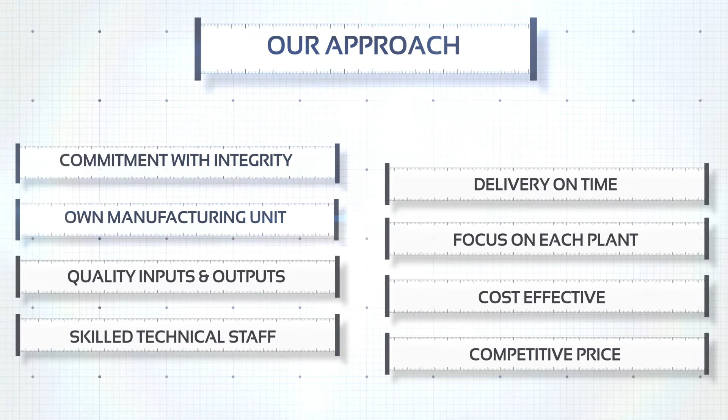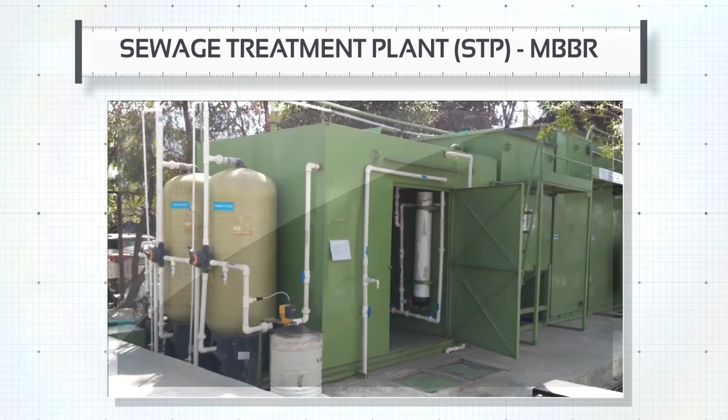Our water treatment solutions: STP, Sewage Treatment Plant, MBBR. We design, fabricate, erect, and commission packaged prefabricated sewage treatment plants with various technologies for treating sewage generated by residential setups within industries, large colonies, hotels, hospitals, IT parks and commercial buildings.

Our MBBR plants use specifically cultured bacteria on a high surface through floating media and reduce the organic load by more than 90%. The treated water can be used for gardening, floor washing, toilet flushing or disposal. It is available in sizes from 5 KLD to 250 KLD. Bigger sized STPs are designed in civil works with a customized approach.

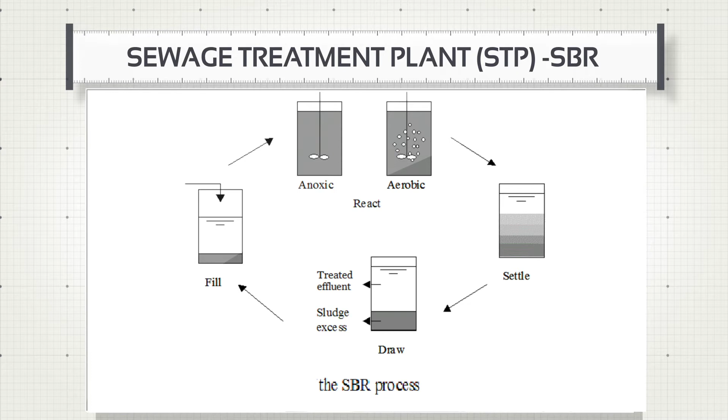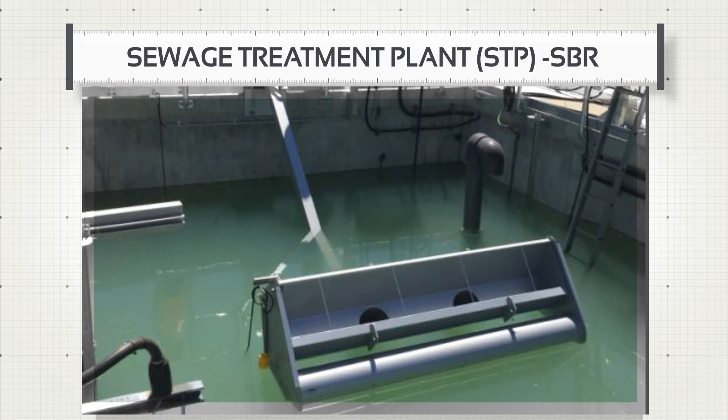STP, Sewage Treatment Plant (SBR). We undertake turnkey projects for wastewater treatment plants based on SBR technology, ranging from sizes 25 KLD onwards. A sequencing batch reactor is a fill and draw, activated sludge system with 5 basic steps: idle, fill, react, settle, and draw, thereby producing a high-quality effluent with low turbidity and nitrogen levels.

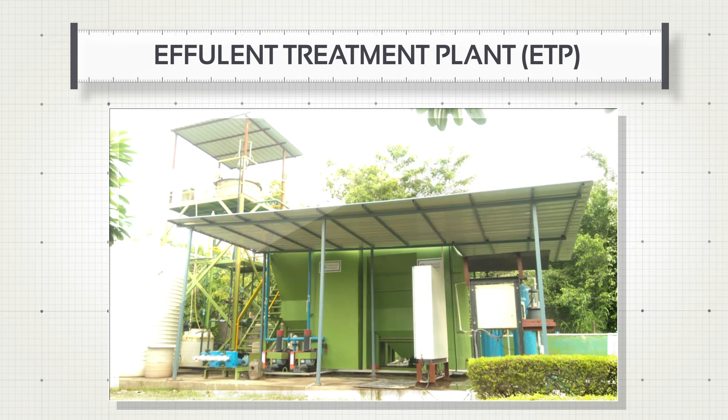Effluent Treatment Plant (ETP). As your partner in corporate commitment to protect the environment, we offer technically and economically efficient solutions to treat industrial wastewater of any type and level of impurities. We offer packaged ETP with nitrification and denitrification.

The choice of treatment stage comprises physiochemical treatment, anoxic bioreactor, fluidized bed aerobic bioreactor (FAB), and other advanced wastewater treatment strategies for recovery, reuse and recycling.

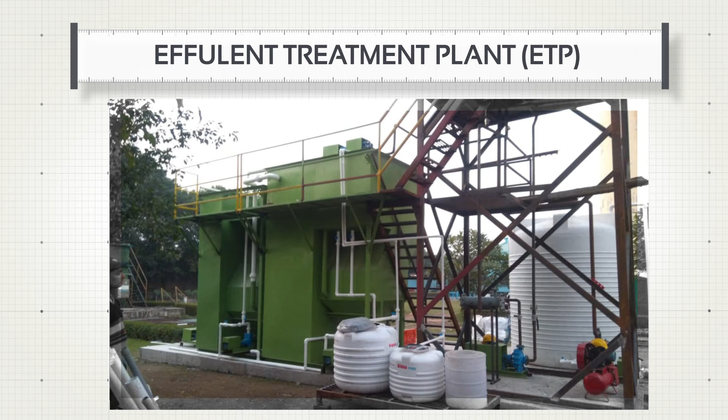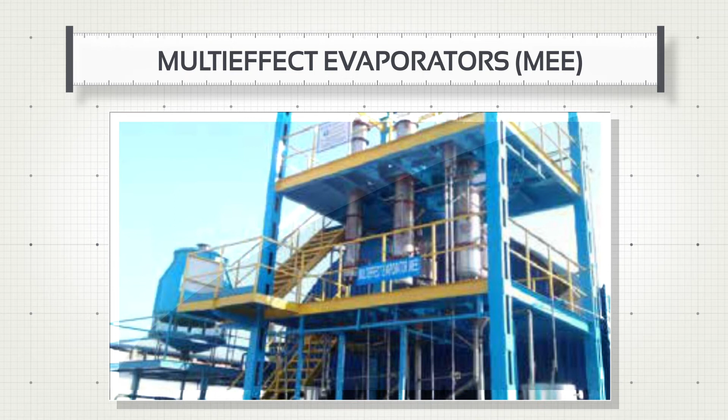Multi-effect evaporator, MEE. Evaporation is a process to concentrate a non-volatile solute from a solvent by boiling of the solvent. It is a special case of heat transfer to a boiling liquid, resulting in separation of a liquid mixture into a liquid product and a vapor.

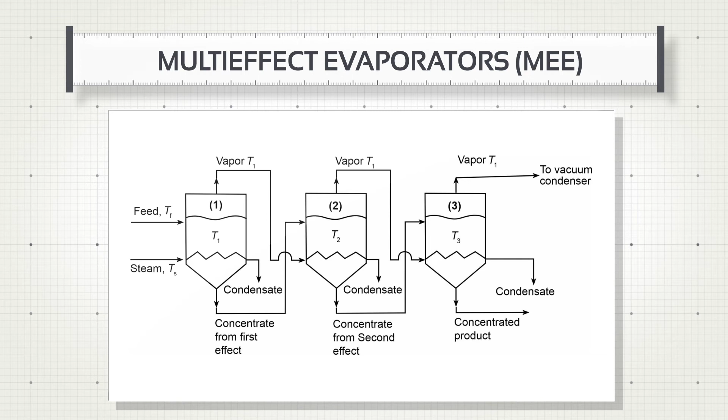The design of an evaporator should be with the objective of economy. The chief factor to obtain the economy or efficiency of an evaporator system is to increase the number of effects, such that the vapors obtained from the first effect act as a heating medium for another effect.

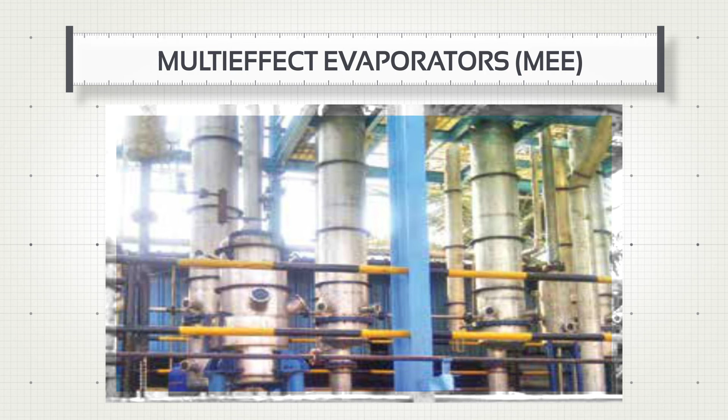Thank you. Genesis Environment does provide other wastewater treatment solutions as well.